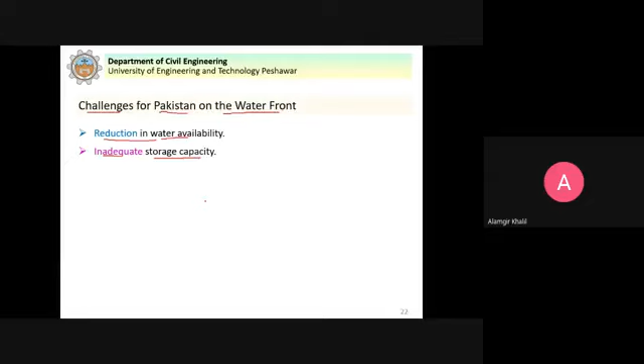Outdated and wasteful irrigation practices. The different methods of water application to the crops are actually wasteful practices. We are wasting huge quantity of water than is actually required by the plants at a particular time.

Unregulated groundwater pumping. As I said before, for sustainability of the groundwater resources, the discharge of the groundwater should be less or at maximum equal to the recharge of the groundwater. Under that condition, if we pump the groundwater, it will be fine, because the recharge takes place and the same or less quantity of water is discharged. But if the quantity of water discharged is more than the recharge, it will cause depletion of the groundwater resources. In Pakistan, we have unregulated groundwater pumping. It should be regulated so that we can make the use of groundwater resources sustainable, so we and our future populations can use it.

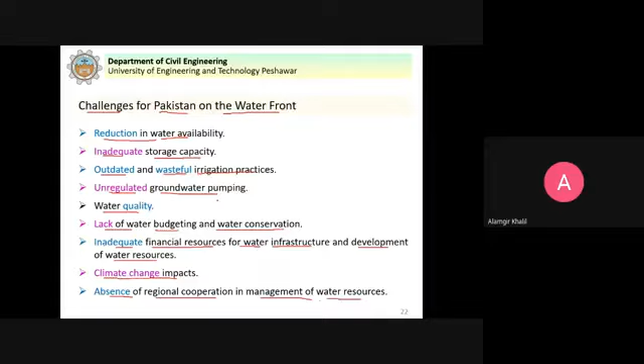Now, irrigation system management institutions in Pakistan. Managing institutions at the federal level: we have the Ministry of Water and Power, Indus River System Authority, Federal Flood Commission, Planning Commission, and Water and Power Development Authority. So at the federal level, these are the different institutions that are directly or indirectly involved in irrigation system management.

All these institutions have their own websites on which you can find information about the completed projects, the ongoing projects, their activities, and annual reports.

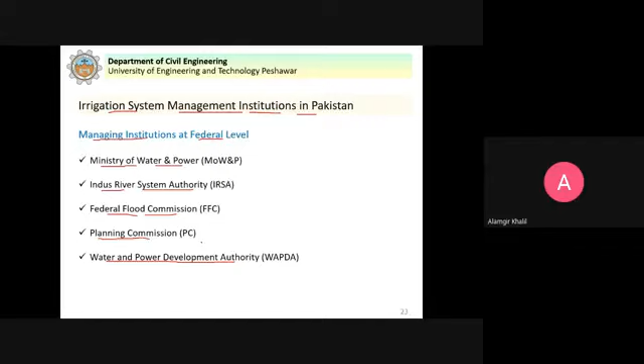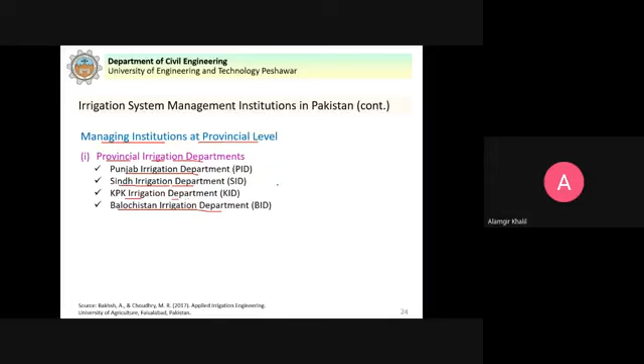Managing institutions at provincial level: we have Punjab Irrigation Department, Sindh Irrigation Department, KPK Irrigation Department, and Balochistan Irrigation Department. Every province has its own irrigation department. Also at provincial level, we have provincial irrigation and drainage authorities, such as Punjab Irrigation and Drainage Authority, Sindh Irrigation and Drainage Authority, KPK Irrigation and Drainage Authority, and Balochistan Irrigation and Drainage Authority. All these departments have their own websites. For example, on the KPK Irrigation Department website, you will find details about completed and ongoing irrigation projects in KPK. So these are the managing institutions.

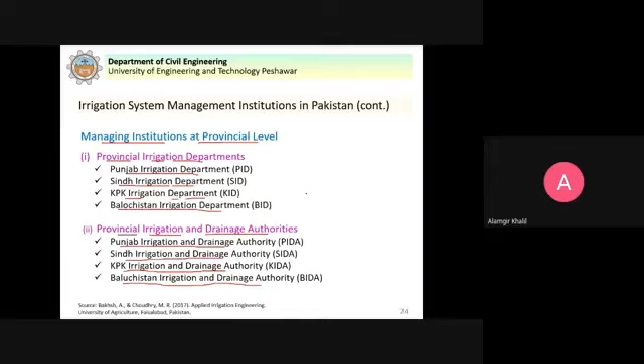Now, average water use for cereal crops. In the USA, they produce 1.56 kg of food per cubic meter of irrigation water. Canada produces 8.72 kg of food per cubic meter. Comparing Asian countries, China produces 0.82 kg of food per cubic meter of irrigation water, India produces 0.39 kg per cubic meter, and in Pakistan we only produce 0.13 kg of food per cubic meter of irrigation water.

The reasons we already discussed: the system needs to be upgraded, and water application methods should use the latest technology, resulting in saving more water and producing more food per cubic meter of irrigation water. So Pakistan has the largest contiguous irrigation system in the world, but the crop yield is the lowest in the world.

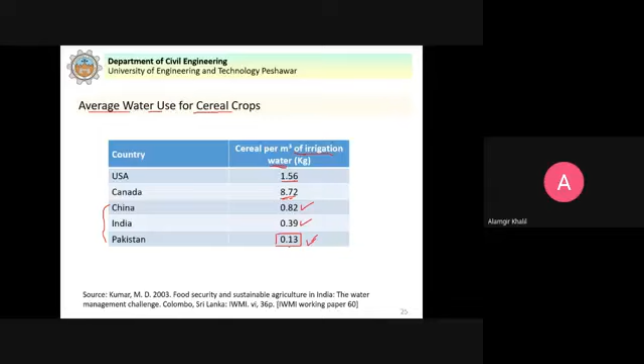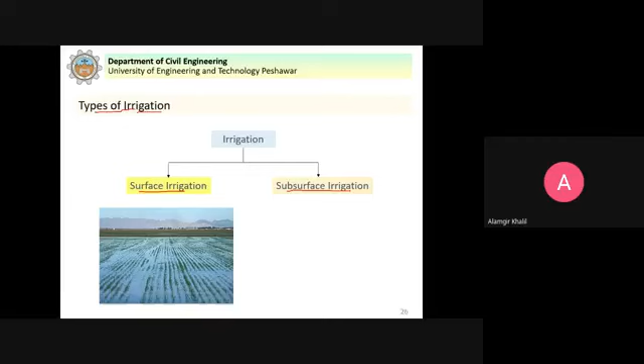Next, we discuss the types of irrigation. Irrigation can be divided into surface irrigation, where we supply water to the crops on the surface of the earth as the water flows due to gravity and irrigates the land. And we have subsurface irrigation, through a system of underground pipes, where water is supplied to the root zone below the ground surface. So that is subsurface irrigation.

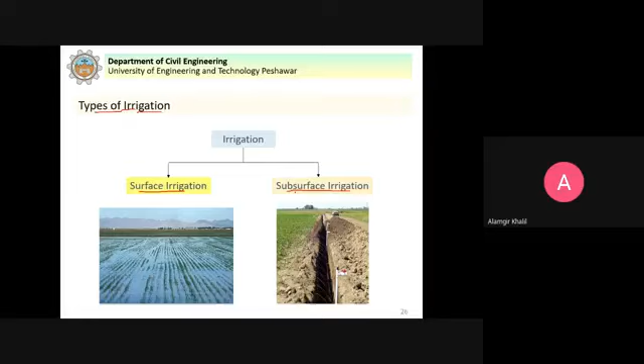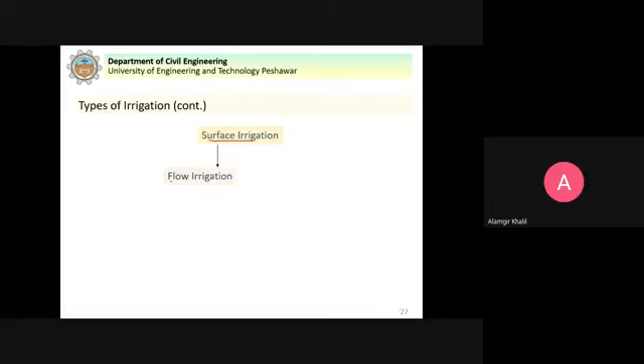Now surface irrigation can be divided into flow irrigation, where flow occurs due to gravity in open channels, and lift irrigation, where water is lifted by mechanical means, for example pumping water from wells or tube wells. That is lift irrigation.

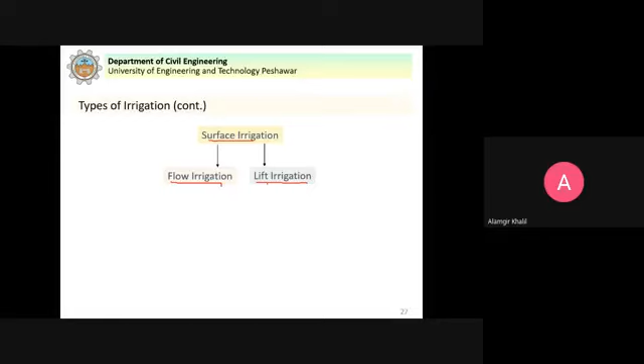Flow irrigation can be further divided into perennial irrigation. Perennial irrigation means that throughout the crop period, a continuous and adequate quantity of water is available to the crops, like we say a perennial river, meaning water is available throughout the year. So that is known as perennial irrigation.

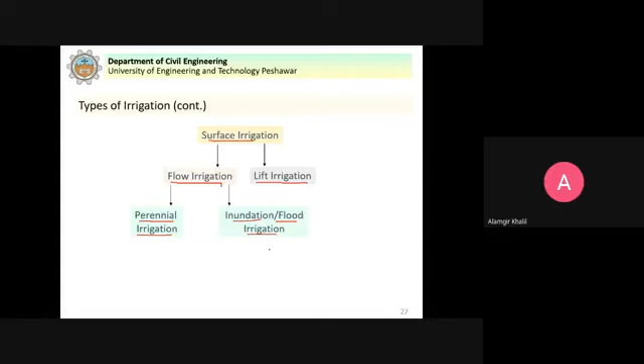The second type is inundation or flood irrigation. In this case, the area of land on which we grow crops is actually flooded. The soil moisture supplies water to the root zone of the crops, and additionally rainfall contributes to the supply of water. So that is known as inundation or flood irrigation.

This flow irrigation can be direct irrigation, where from the river we divert water through a canal - a diversion scheme. Or we have storage irrigation, where we construct a dam to store water - a storage scheme. Or it can be a combination of both storage and diversion. So flow irrigation can be either a diversion scheme, a storage scheme, or a combination of both.

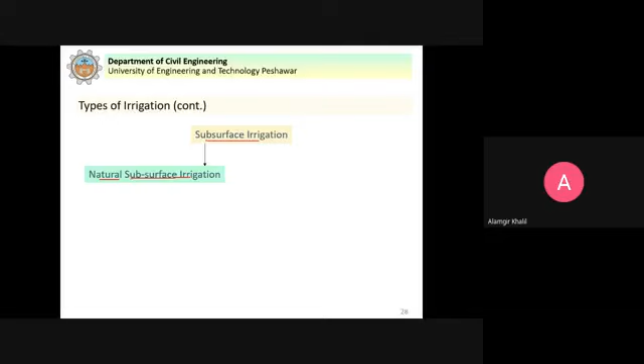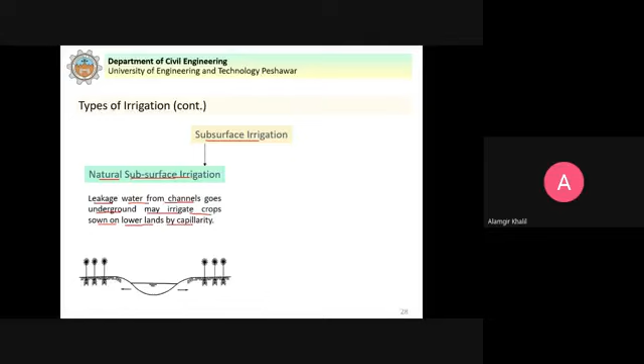Subsurface irrigation can be further divided into natural subsurface irrigation. In natural subsurface irrigation, leakage water from channels goes underground and may irrigate crops sown on lower lands by capillarity. This can sometimes happen where water channels leak and the water goes underground, irrigating crops on lower lands, in which case it is called natural subsurface irrigation.

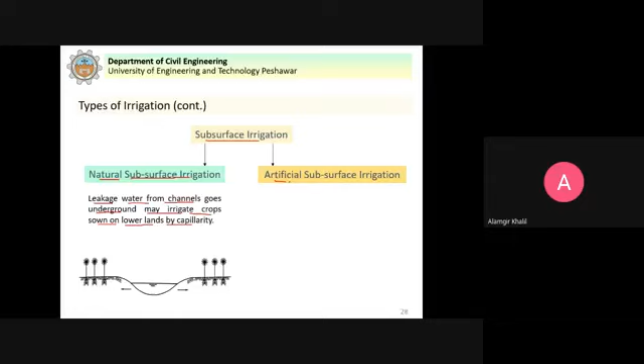And we have artificial subsurface irrigation, where a system of open jointed drains is artificially laid below the soil to supply water to the crops by capillarity. We have a network of open jointed drains that supply water to the root zone, taken up by the plants for their growth. This is artificial subsurface irrigation.

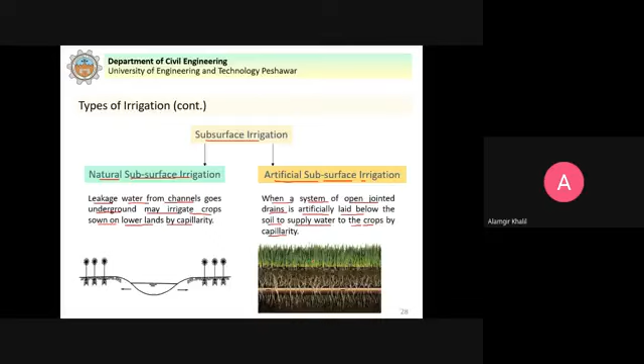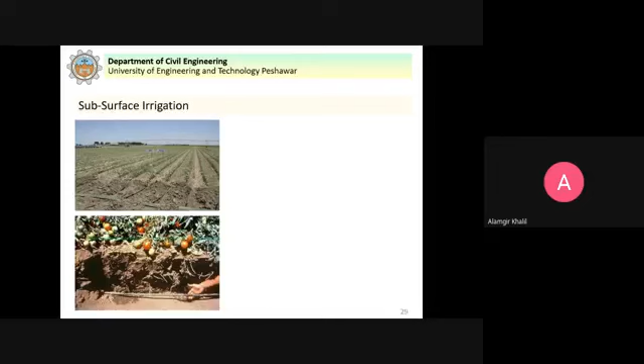Now you can see here that in subsurface irrigation, below the surface we have this network of pipes, and they supply water to the root zone, and this is how the plants take up the water and grow. But this is not only expensive to install, but the maintenance of such system becomes challenging. Although it is practiced, if there is any blockage, then it becomes very difficult to carry out the maintenance. But anyhow, it is artificial subsurface irrigation.

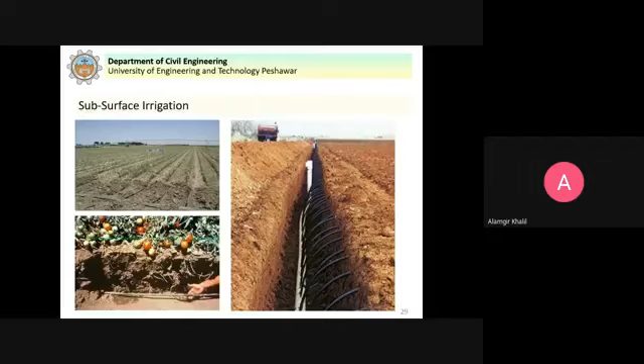Next, we discuss the different methods of irrigation water distribution in the farms. Once the water reaches the agricultural fields, how the water is distributed, by which methods, to the crops - this we will discuss in this topic.

Irrigation water may be applied to the crops by various methods that include free flooding, border flooding, check flooding, basin flooding, furrow irrigation method, sprinkler irrigation method, and drip irrigation method. So these are the methods by which water can be distributed in the farms. We will discuss briefly each of these methods.

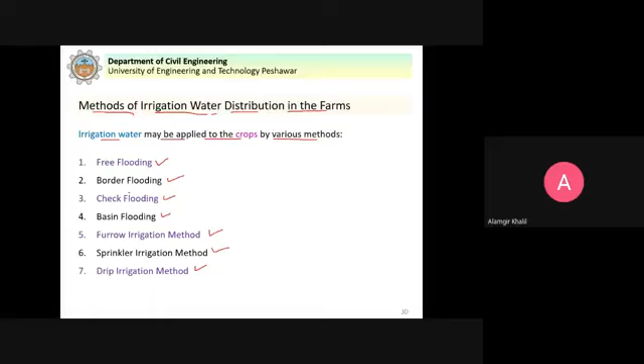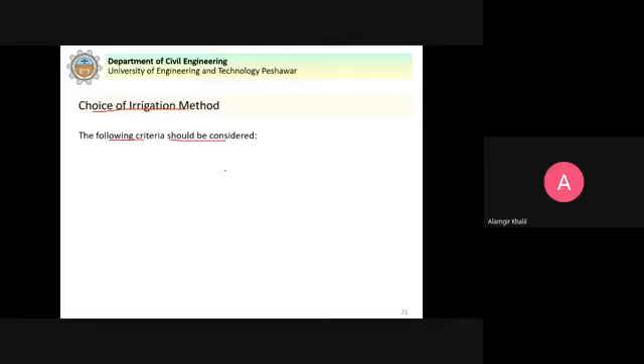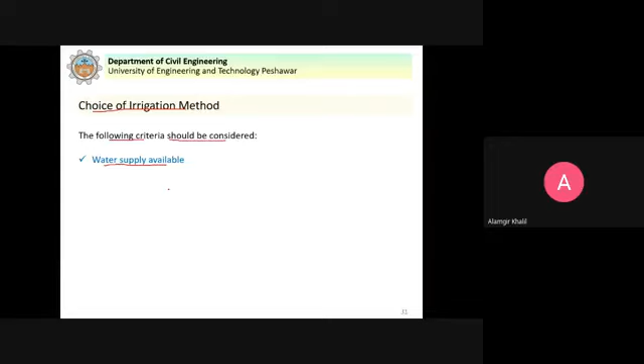Now, choice of irrigation method - how we use the different methods to supply water to the crops. The choice of irrigation method, the following criteria should be considered. Water supply available - is the water available abundantly, or is the water availability scarce, meaning less quantity of water available for agriculture. Based on this we can select the suitable method.

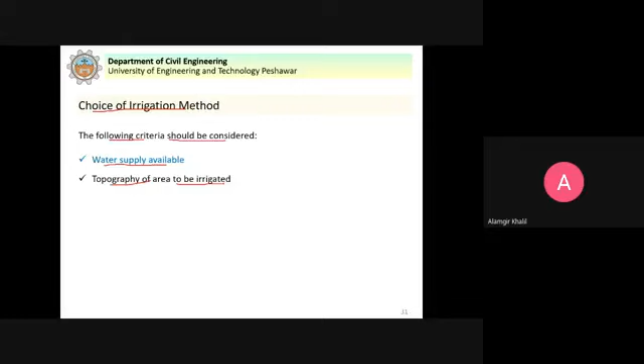Topography of the area to be irrigated - what kind of land is there, is it a hilly area or a plain area? Climate of the area, and soils of the area - what type of soils are there?

In climate, for example, if we have more rainfall, consequently the method for water application should be such that it can supply less quantity of water as required by the crops. If the climate is arid, semi-arid as we discussed earlier, then in that case the water requirements by the crops will be more.

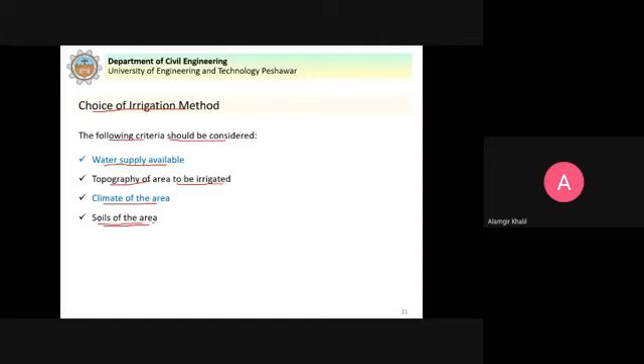Soils of the area - what type of soils are there, more permeable soil, less permeable soil. What type of crops are to be grown, this is important. The overall economics of the system - when we provide an irrigation system for any agricultural project, we have to check the economics, what is the cost, and then the returns that we will get from the system. Is it cost effective?

And the local traditions and skills - if we are using latest technology, do we have the skills of the farmers to use that technology? So all these factors will affect the choice of any irrigation method or water application to the agricultural land.

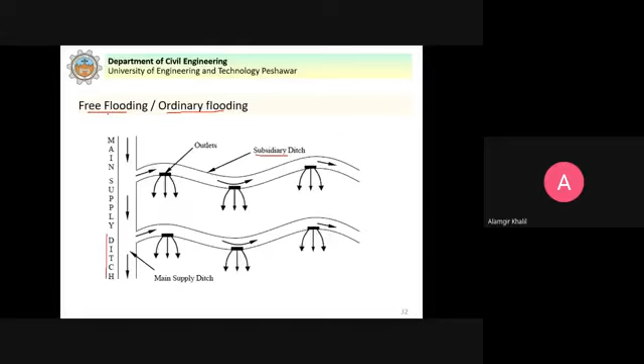Now next we start with free flooding, also known as ordinary flooding. In this method we have the main supply ditch, and then from here we have subsidiary ditches. These are narrow channels of water, and we just flood the area. That is why it is known as free flooding, also known as ordinary flooding. We just flood the entire surface and no attempt is made to control the flow of water. You can see here, we just simply flood the entire area with the water. So this is an example of free flooding.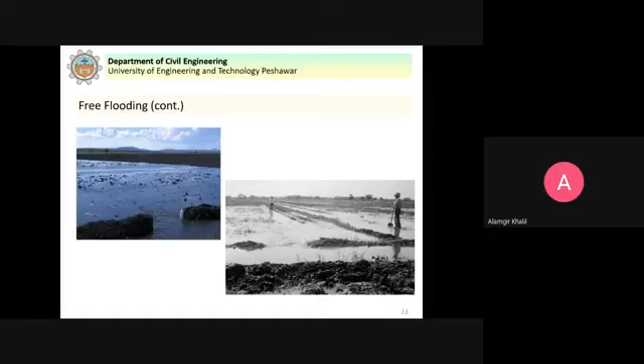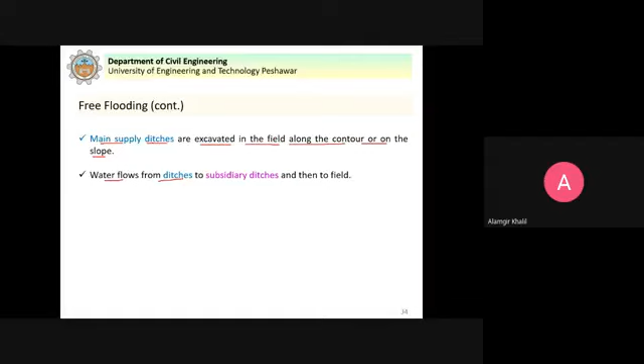So we have main supply ditches. These are excavated in the field along the contour or on the slope. Water flows from ditches to subsidiary ditches and then to the field. Subsidiary ditches are spaced 20 to 50 meters apart depending upon slope, texture of soil and crops - these are the factors that determine the spacing. But the range is 20 to 50 meters apart.

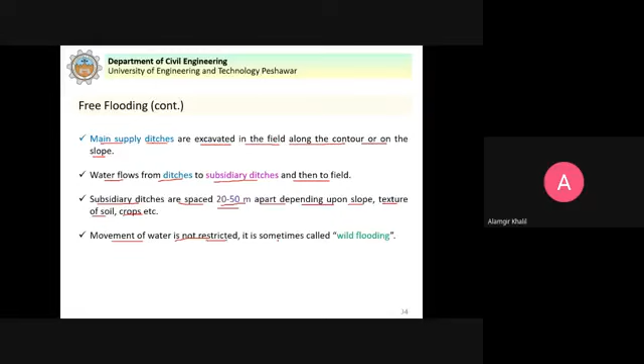Movement of water in this method is not restricted. It is sometimes called wild flooding. So this was a brief description of the free flooding.

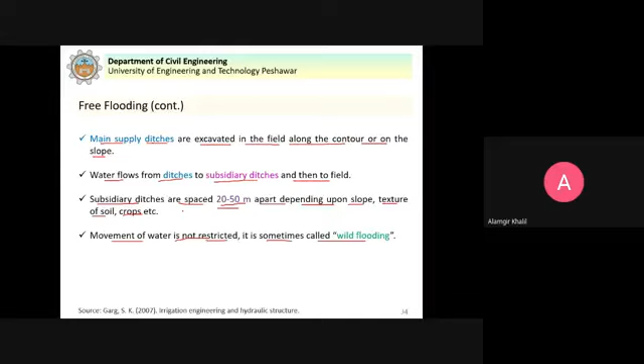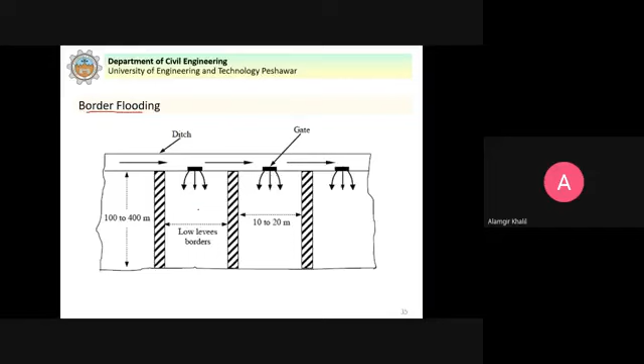Next we have border flooding. In border flooding you can see that we make these borders. We divide the land into strips. This is how you can see - the land is divided by these borders here into these strips. So this is border flooding, and then the area is flooded with water.

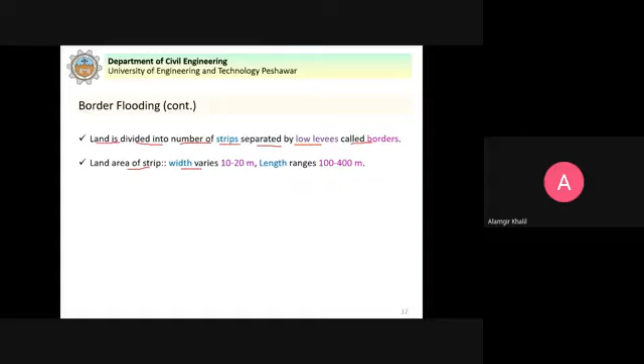Land is divided into a number of strips separated by low levees called borders. Land area of the strip width varies 10 to 20 meters and length ranges 100 to 400 meters. Ridges between the borders should be sufficiently high to prevent overtopping during irrigation. The land should be perpendicular to the flow to prevent concentration of water on either side, so that the water uniformly flows over the strip and does not concentrate on either side of the border.

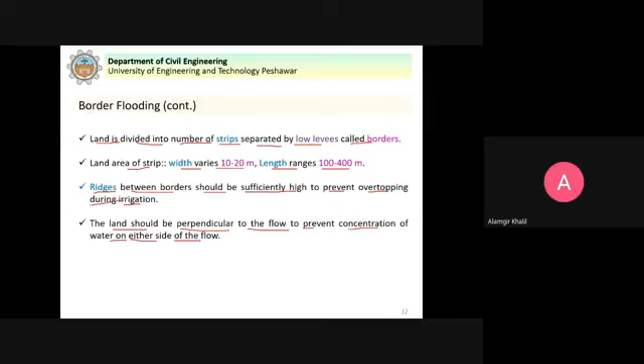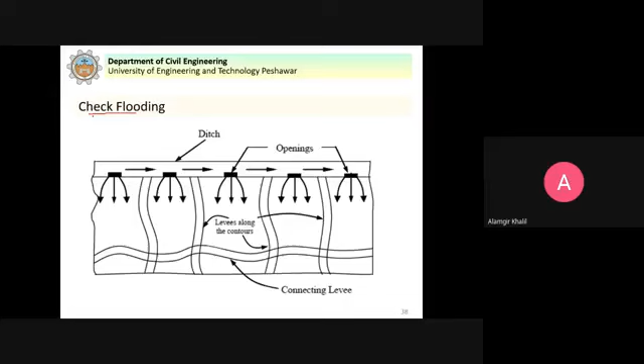The third one is check flooding. In check flooding, we further divide the strips into small plots. You can see here, we have the levees and then the cross levees, so the area is further divided into small plots. In this method, like border flooding, we have control over the water, because the water will be supplied to each of these plots separately. This is known as check flooding. You can see here, this is an example of check flooding - the area is divided into small plots.

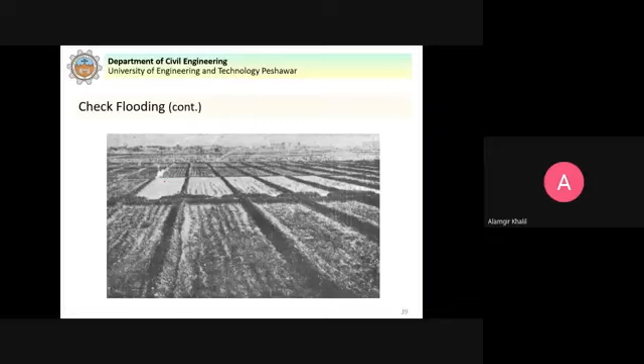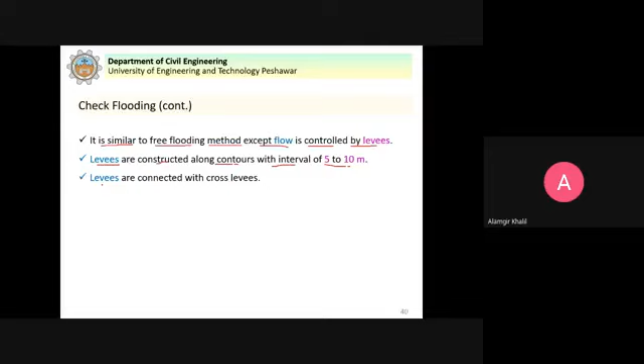It is similar to the free flooding method, except flow is controlled by levees. Levees are constructed along the contours with intervals of 5 to 10 meters. Levees are connected with cross levees, so the confined plot area varies from 0.2 to 0.8 hectares.

This method is suitable for permeable as well as less permeable soil. If the soil is permeable, there's no problem, because we divide the area into plots. If the water quickly infiltrates, the area is small, and for the other plot we still provide water. It is also suitable for less permeable soil.

If the infiltration of water is less, it is still fine. Keep the water on the land for more time so that it is effectively infiltrated to the root zone with the passage of time.

Next we have basin flooding. In basin flooding we have the main ditch that supplies the water, and then through subsidiary ditches we supply water to the trees, on either side. So we have a small basin around each tree where the water is supplied, and that is used by the trees. So this is known as basin flooding.

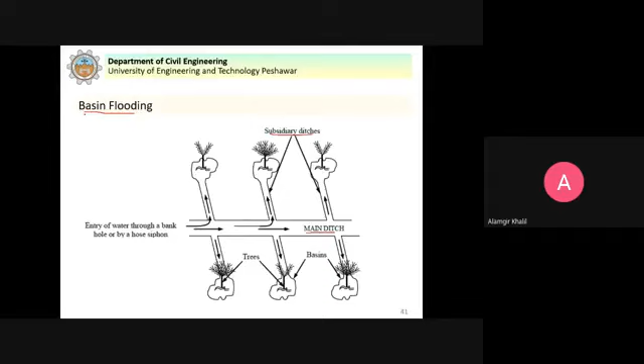This method is a special type of check flooding and is adopted specially for orchard trees, for those trees that bear fruits. For those trees this method can be adopted.

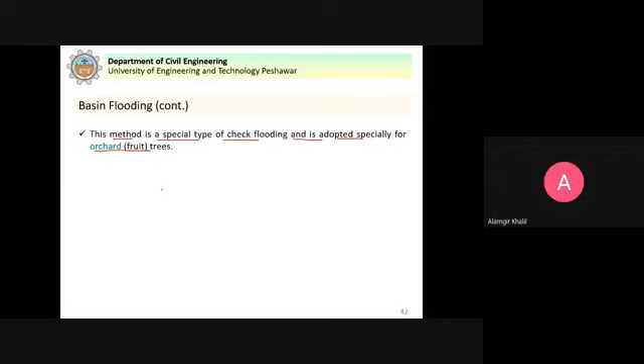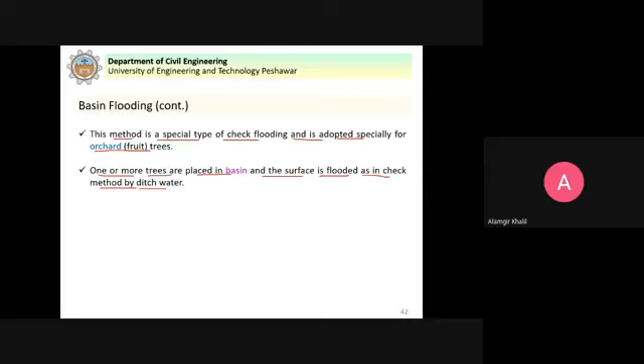One or more trees are placed in a basin and the surface is flooded as in the check method by ditch water. You can see here that one or more trees are placed in a basin and the surface is flooded by the ditch water. For example, the water is flowing and then it will flood this basin here. So this is basin flooding.

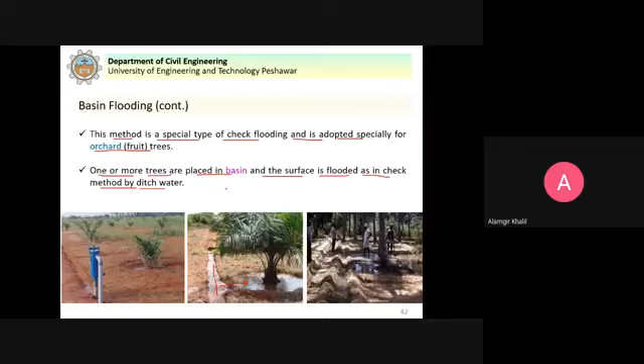Next we have the furrow irrigation method. In furrow irrigation, furrows or field ditches are constructed on the land. We have water flowing in the ditch or narrow channel, and from here the water only flows in these furrows.

Now you can see that as compared to the other flooding methods, the water does not cover the entire surface, but the water only flows in these furrows. And the crops that are grown here, the water infiltrates into the root zone and supplies water to these crops. This is known as the furrow irrigation method.

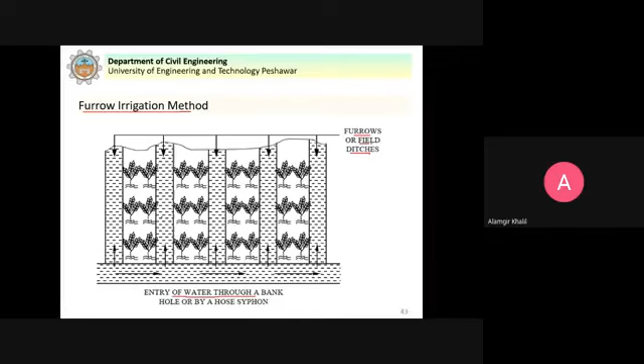This method is more efficient than the flooding methods. Why? Because in the flooding method the water floods the entire surface, but here the water does not flood the entire surface, only the water flows in these furrows. Water does not flood the entire surface. So this method is more efficient compared to the flooding technique, because here we can save water, not the entire surface of the ground is flooded with water.

Moreover, this method is suitable for row crops, those crops which can be grown in rows. This method of irrigation is suitable for those crops.

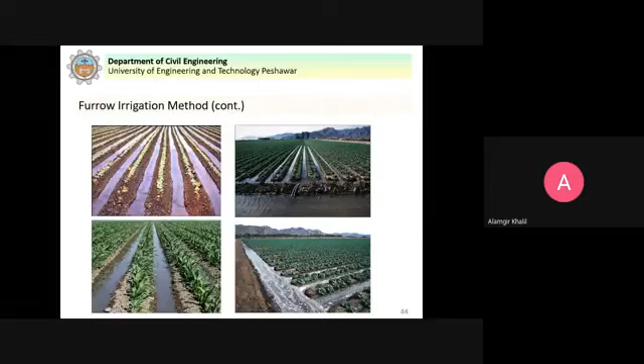Furrows are small channels which carry water down the land slope between the crop rows. Water infiltrates into the soil as it moves along the slope. The crop is usually grown on the ridges or raised beds between the furrows.

In flooding methods, water covers the entire surface, while in the furrow irrigation method, only 1/5 to 1/2 of the land surface is wetted by water, so it results in less evaporation. Evaporation losses are reduced, and also because not the entire surface is flooded, we are saving water too. A lesser quantity of water is applied.

The furrow method of irrigation is used for row crops like potato, maize, sugarcane, cotton, and tobacco, with furrows developed between the crop rows during planting and cultivating. So this furrow method is used for row crops, those crops which are sown in rows like potato, maize, sugarcane, cotton, and tobacco.

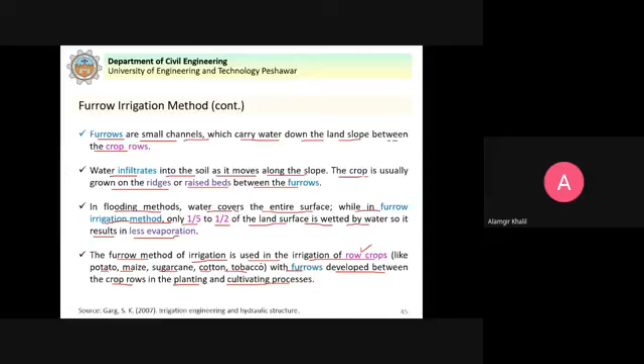Next we have the sprinkler irrigation method. You can see here the water is sprayed over the crops.

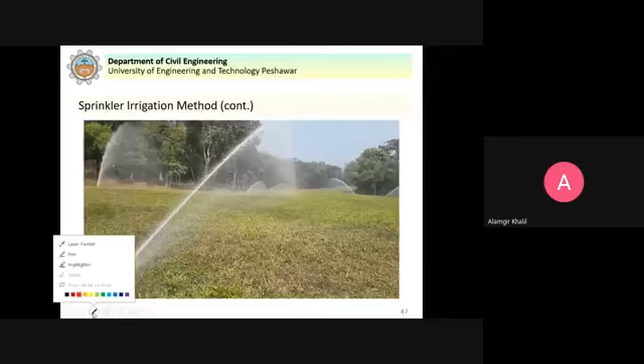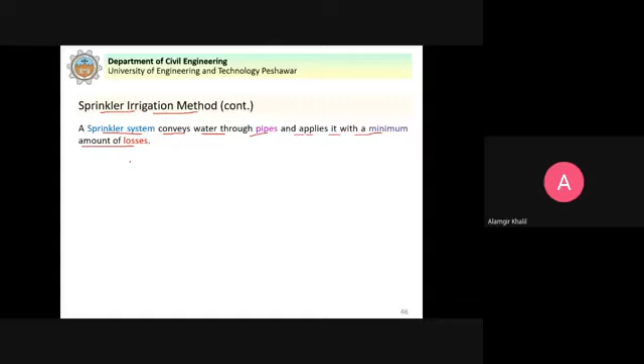So this is the sprinkler irrigation method in which we sprinkle the water over the crops. A sprinkler system conveys water through pipes and applies it with a minimum amount of losses. Just like artificial rain, we spray the water over the crops. This method is more efficient compared to the previous methods, because here we just spray the water, which can save more water, and we just apply the quantity of water that is required by the plants.

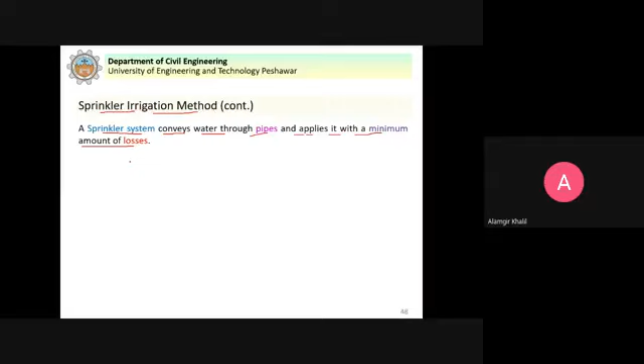Of course, this simple sprinkler system sprays the water, so the water is also sprayed over the land surface in addition to the plants, so the efficiency is still less than 100% because of that, but this efficiency is greater than the previous methods of water application to the crops. In this system we use sprinklers to sprinkle the water, spray the water over the crops.

In sprinkler irrigation method, water is applied to the soil in the form of a spray through a network of pipes and pumps. It is a kind of artificial rain.

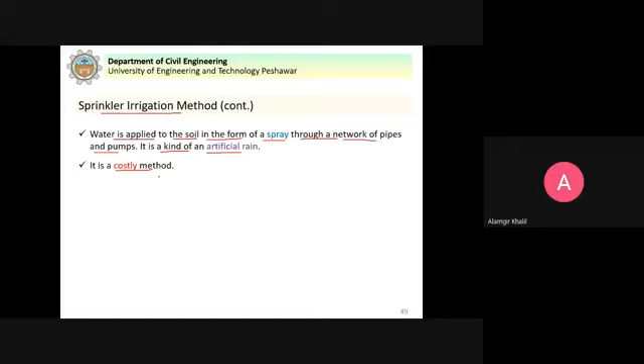It is a costly method. This is the drawback of this method. We have to provide a network of pipes and sprinkler systems that spray the water, so the initial cost and operation and maintenance cost will be high compared to the previous method.

It can be used for all types of soils and for widely different topographies and slopes, because we spray the water, this method can be conveniently adopted for widely different topographies and slopes.

It can advantageously be used for many crops because it fulfills the normal requirement of uniform distribution of water. Another advantage is uniform distribution of water over the surface, fulfilling this requirement.

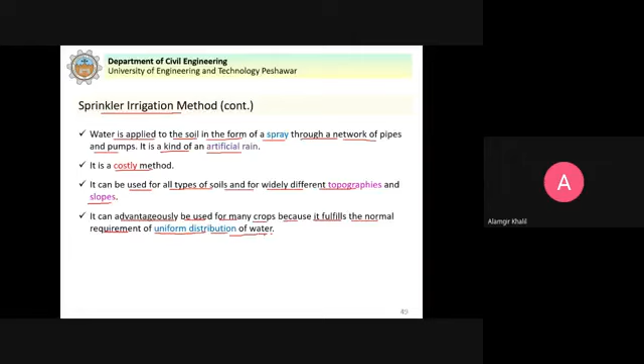Now, suitability of this method: we have uniform application by artificial rain, good application efficiencies from 70 to 80%, dependent on wind, temperature and humidity, fairly terrain independent, but design must take terrain into account - the surface, the natural ground topography.

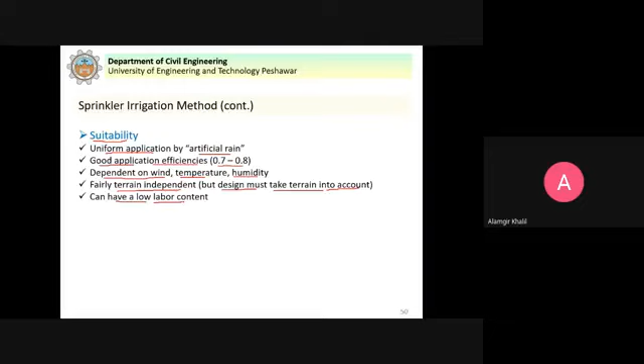It can have a low labor content if the system is efficiently running and operating, then it may not require more labor. So this can be an advantage. However, it has more initial cost to install, high maintenance cost due to pumping, and we have to maintain this system, which will have a maintenance cost and can be complex to run.

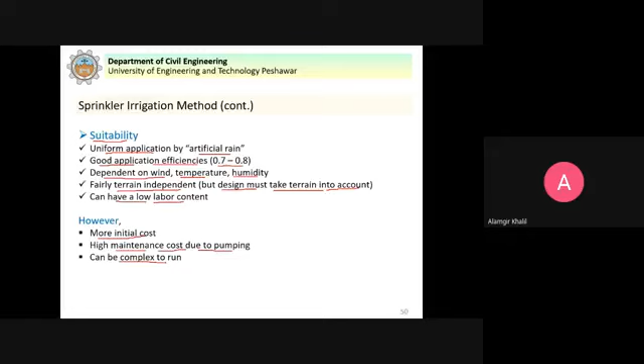To design this sprinkler system, we keep in view the topography of the area. It will have initial cost and maintenance cost for efficient running of the system to supply water to the crops, and the farmers must have the skills to use such systems.

The sprinkler system can be permanent, semi-permanent, or portable. Permanent means the whole system is fixed in one area, just spraying the coverage area, as you saw in the previous video.

We can have semi-permanent, where the main pipes are present but the laterals can be removed. In portable systems, the whole assembly can be moved from one place to another and used for water application to the crops.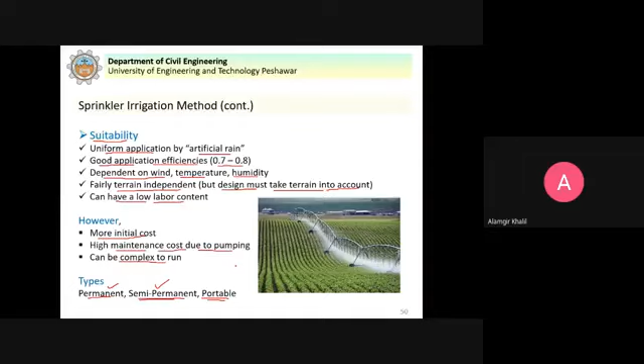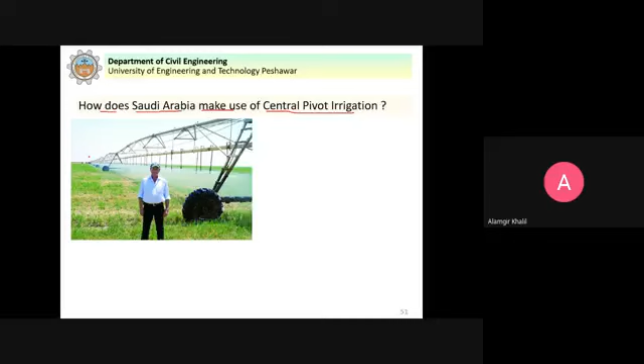How does Saudi Arabia make use of central pivot irrigation? You can see this whole assembly of the sprinkler system, through nozzles spraying water over the area. This moves around a central pivot point - for example, this whole assembly moves all around this area where we grow the crops, comes back, and sprays water over the entire coverage area to supply the crops. This is the example of a central pivot irrigation system.

The idea here is that if less quantity of water is available, we can use this latest technology to grow more food, because in the conventional flooding methods common in Pakistan, we are wasting water. We face reduction in water availability, and these systems are now outdated, resulting in wastage of water. If we adopt this latest technology, we can save a lot of water for other purposes, or bring additional land under cultivation, and increase food production.

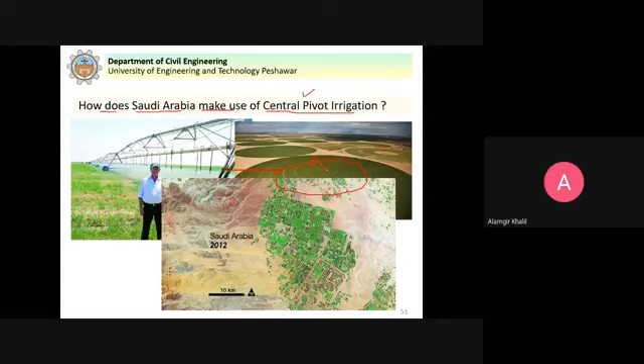The last one is the drip irrigation method. In this method, we pump the water, for example, from a well, and after passing it through filters and screens to remove solids or suspended material, through a network of pipes, the water is supplied underneath the plants.

You can see the cost of installation of this system, but this is the most efficient system among all the methods, because even in the sprinkler system we spray the water over the entire land, but here we just directly supply the water underneath the plant. This results in huge quantity of water saving, but it is a costly method.

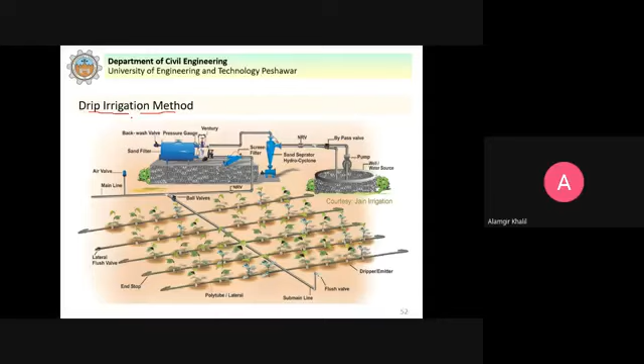This is known as the drip irrigation method. It can be surface or subsurface. These pipes can be below the surface of the earth, passing through the root zone. Here you can see the surface drip irrigation method, where you see the network of pipes on the surface of the ground, and they directly supply the water underneath the plants, so the whole area is not flooded.

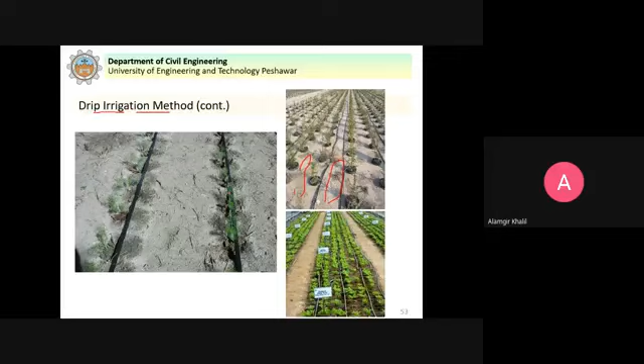This results in saving more water. This is the most efficient method in terms of saving water. This is the drip irrigation method, also known as trickle irrigation.

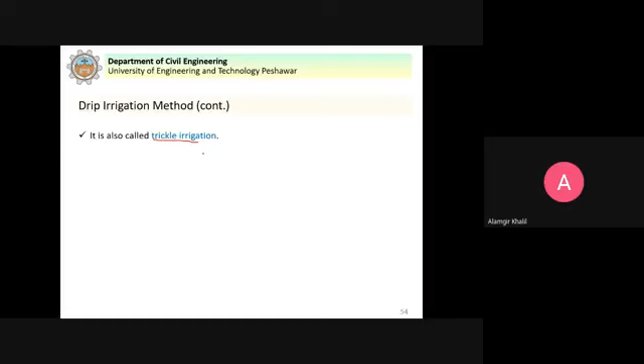It consists of an extensive network of pipes of small diameter that deliver water directly to the soil near the plant, as you can see here.

The drip nozzles, also called emitters, emit the water and are fixed on laterals at regular intervals of about 0.5 to 1 meter, discharging water at very small rates of the order of 2 to 10 liters per hour. So small pipes supply the water slowly and directly underneath the plants.

These are more efficient methods, but their installation, operation and maintenance can be a big challenge, which is why we could not adopt these systems on a large scale in Pakistan.

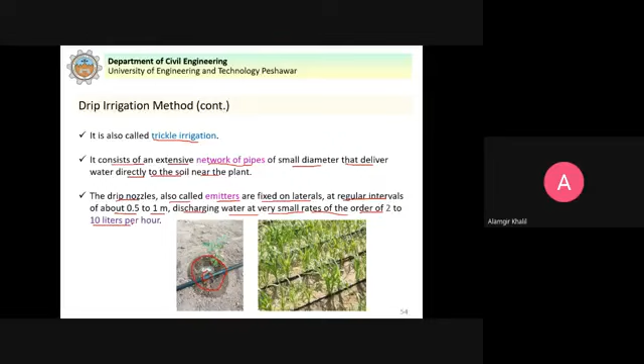Now, efficiency of the different irrigation methods for water application on the farms. We have less efficient and more efficient methods. In flood irrigation, because we flood the area, it results in wastage of more water. At any particular time, the crop requires a certain amount of water, but we supply more than that, so it is least efficient.

Irrigation efficiency is low. Then in furrow irrigation, water is only supplied to the furrows, not the entire surface is flooded, so that can result in saving water compared to flood irrigation. It means furrow irrigation is more efficient than flood irrigation.

Still, we saw that in sprinkler irrigation we spray the water over the area, which can result in saving more water, supplying just what is required by the plants. Although the water is sprayed over the land surface in addition to the plants, it is a more efficient method.

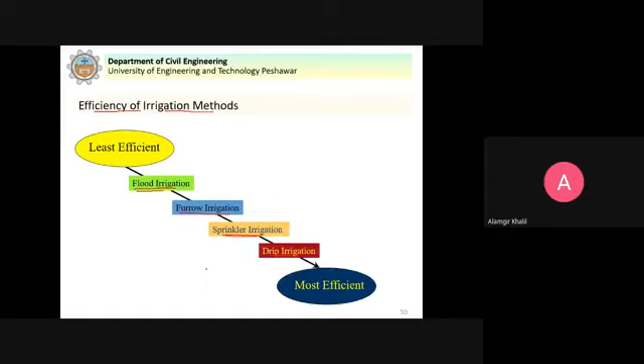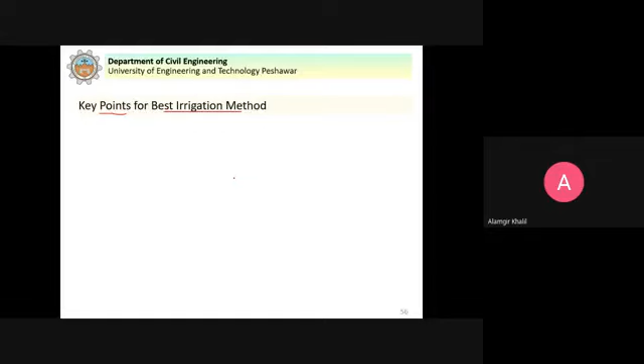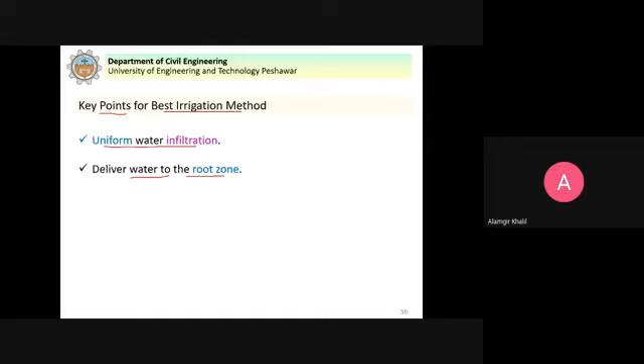Key points for best irrigation method: uniform water infiltration, for the area there should be uniform water infiltration to the root zone of the crops, delivering water effectively to the root zone, because that is where plants take up water and use it for their growth.

The best method of irrigation will be the one with higher efficiency, as we discussed for the different methods, and it should have the lowest operative cost. When we operate that method, it should be cost effective; if it is expensive, it will not be feasible to use that system.

It should have the lowest cost per acre and per metric ton produced, causing minimum cost per acre and per metric ton. So these are the different points for the best irrigation method. We studied briefly about the different methods of water application on the farms.

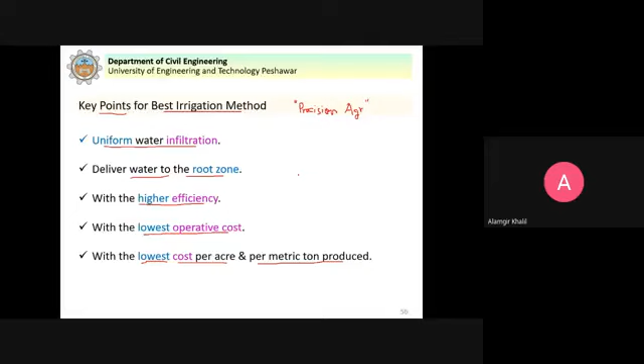Nowadays, there is another term used which is known as precision agriculture. You might have heard this term. In precision agriculture, farmers use information technology that provides continuous information about the climate of the area and regularly monitors the health of the crops, based on which they determine how much quantity of water they need to supply and in what amount.

So using information technology, we are able to produce more food per unit of irrigation water. This is known as precision agriculture.